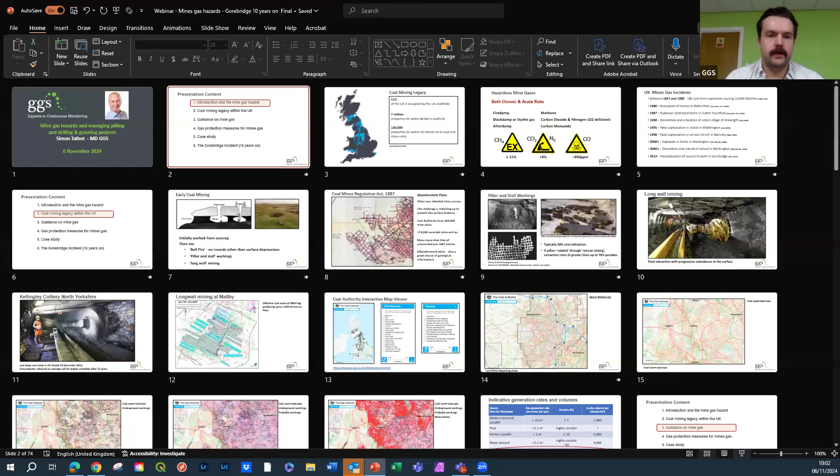So, the content I've just gone through, and we're going to finish off with the Gorebridge incident. So, diving into the first topic, an introduction to mines gas. I'm sure many of you will be very familiar with this. I'm going to turn my camera off so that I'm not distracting from the content, but I'll come back at the end. So the first topic is the extent of the mining legacy within the UK.

From Coal Authority data, 11% of the footprint of the UK is actually underlain by coalfields. That means that about 7 million properties lie within the British coalfield area, and 130,000 properties lie within 20 metres of at least one mine entry. So a significant impact on existing development, let alone new development.

The hazards we're looking at are both chronic and acute. In old terms, fire damp was one of the main risks. This is methane, but we also have black damp or stythe gas, which is carbon dioxide and nitrogen, another way of looking at it is an oxygen deficient atmosphere, which is equally dangerous. And then we have afterdamp, which is carbon monoxide.

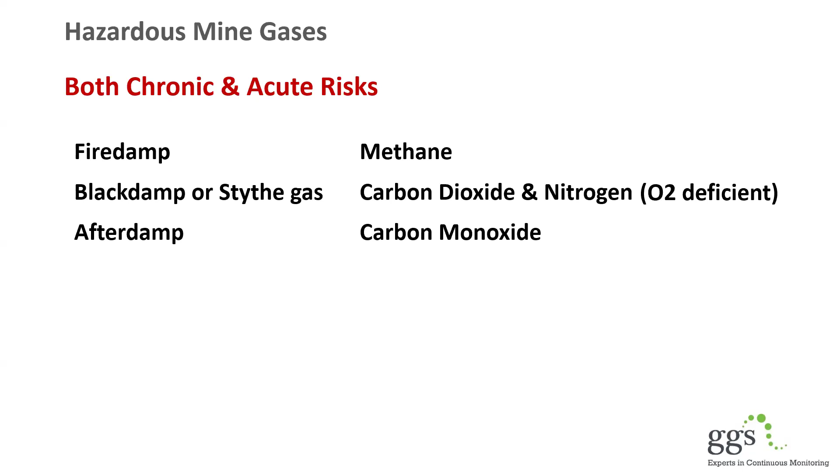So the risks are the explosive risk from methane. As many of you will know, methane is explosive between 5 and 15%. Carbon dioxide is an asphyxiant, and it is fatal at concentrations above 8%. Carbon monoxide is a toxic gas, which is potentially fatal at concentrations just over 800 parts per million.

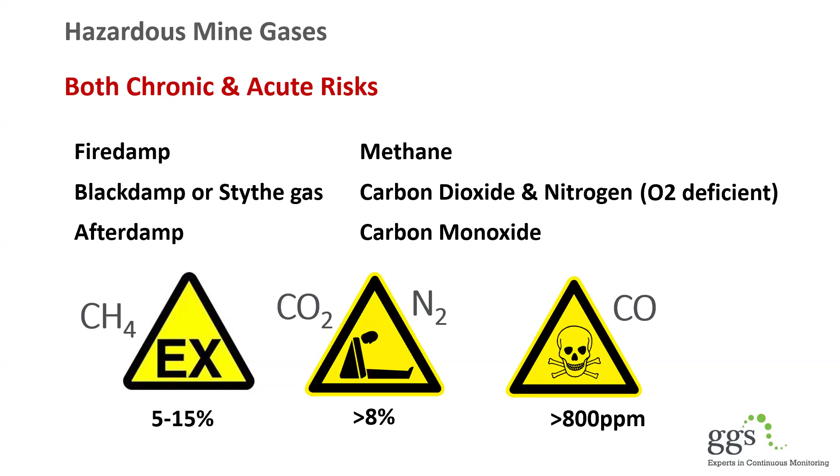Over the years, a number of people have been killed from mines gas. Within the mining industry, between 1851 and 1980, there were 186 recorded coal mine explosions, causing 10,000 fatalities.

But more recently, we've had evacuation of homes, explosions in homes, demolition and relocation of an entire village in Arkwright in Derbyshire. We've had a fatal asphyxiation in a stable in Widdrington, another fatal asphyxiation of construction workers in a service trench in Barnsley. And in the 2000s, we've had explosions in a home in Workington. And again in Workington, a school was demolished and rebuilt.

But more recently, we've had the hospitalisation of council tenants on the Gorebridge estate, and more of that at the end of the presentation. So those are the hazards and real effects associated with mines gas incidents. So let's look at the mining legacy in a little bit more detail.

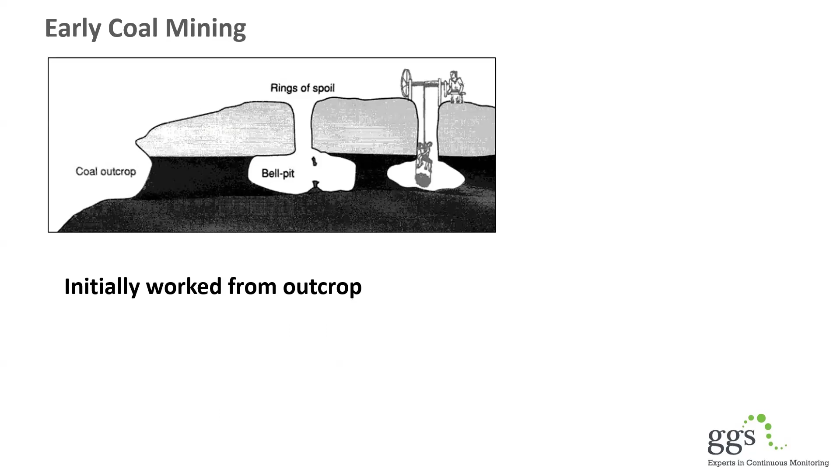Going back to Roman or even pre-Roman times, coal was won by working the outcrop. But as time went by, other techniques of winning coal were developed, and the next step was sinking shafts down to shallow mine workings and working the coal out from what are called bell pits. In places like Derbyshire, you can see the surface subsidence features associated with bell pit working.

But as time went by, even more systematic ways of working coal were developed. One of the terms, pillar and stall or room and pillar, was very widespread. It was only when we get into the 20th century that more mechanized techniques such as longwall mining became dominant.

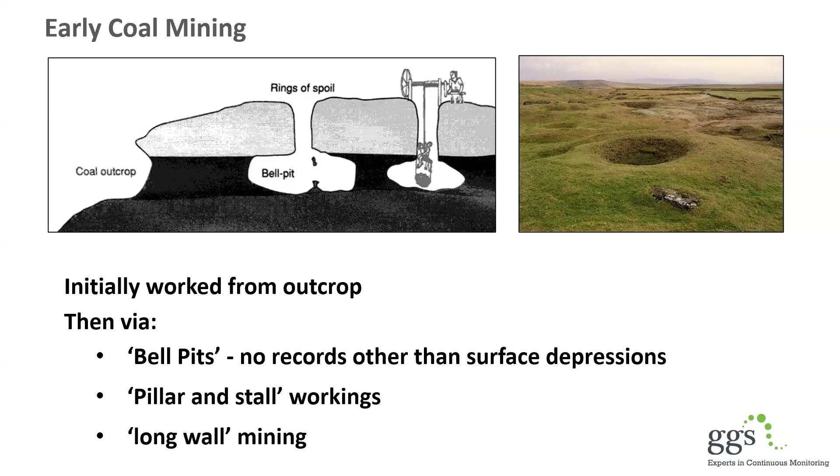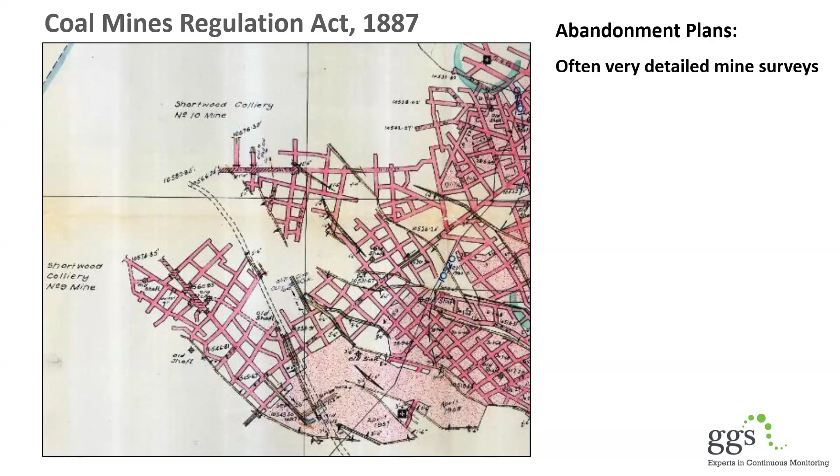So one of the key turning points for the British coal mining industry was the Coal Mines Regulation Act of 1887. And this required operators to have their workings accurately surveyed and to lodge those plans with the authorities. So these abandonment plans are often very detailed surveys of the workings, but the difficulty we have is in matching these underground surveys with present day surface features. But one thing which is common to both will be shaft locations, but these can be up to 10 meters out from current or accurate locations.

So the Coal Authority is a legal body responsible for holding these abandonment plans, and they have approximately 360,000 of them. And on these plans, there are 172,000 recorded mine entries. But unfortunately, there's many, many more unrecorded entries which predate the 1887 legislation. Another feature is that these abandonment plans have been a great source of geological information because they record the location of faults and the dip and strike of the different strata.

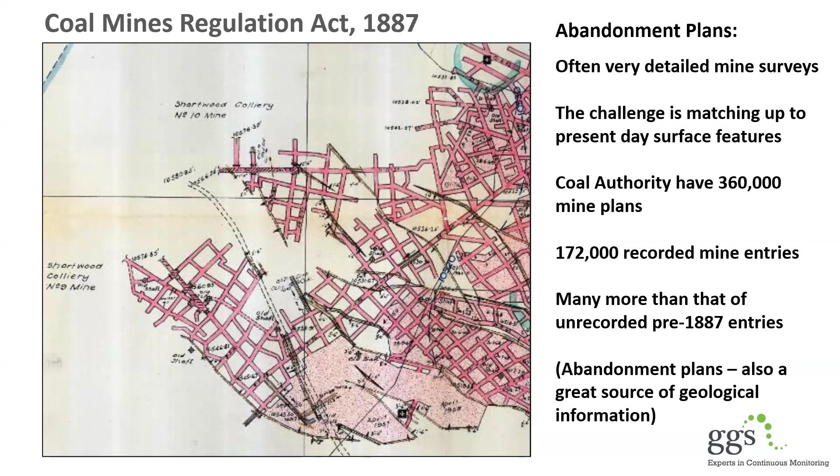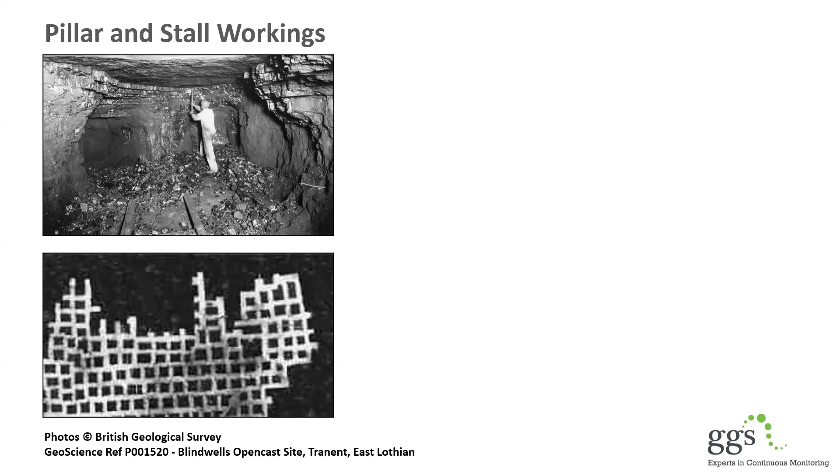So pillar and stall workings are often represented on these plans, and this is a photograph of how they were actually worked by hand. And in plan, this is the sort of workings that would be developed: systematic roadways and cross-linking rooms or stalls linking those roadways. We can also see where they've been exposed in open cast mines, and very clear representation there in this photograph from the Blindwells open cast site.

So typically, pillar and stall workings will have a minimum of 30% coal extraction, but often, as a district was worked out, the operators would require pillars to be robbed in what's called retreat mining back towards the shaft. Clearly, taking coal out of the pillars reduces the safety of the roof, but as they moved back towards the shafts over time, extraction rates could reach up to 70% in some cases.

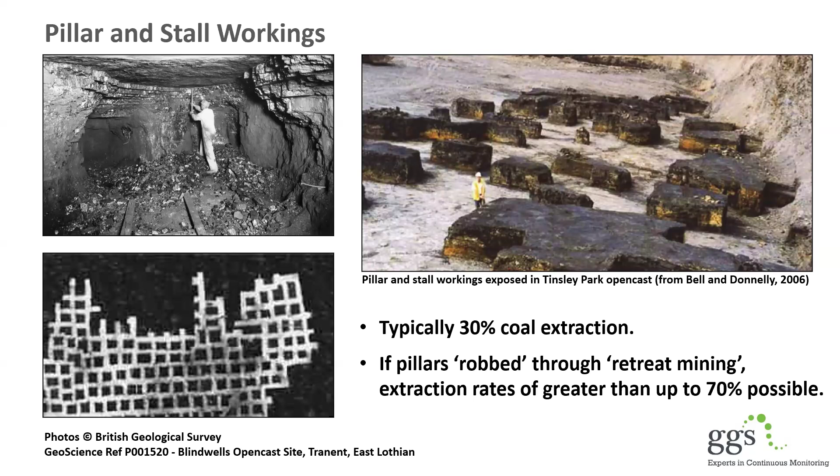And this allowed progressive subsidence behind the active working face. And this led to a subsidence wave hitting the surface. And this was predicted. And in my early career, when longwall mining was still active in the early 1980s, one of my roles was to actually calculate what sort of surface subsidence was going to occur.

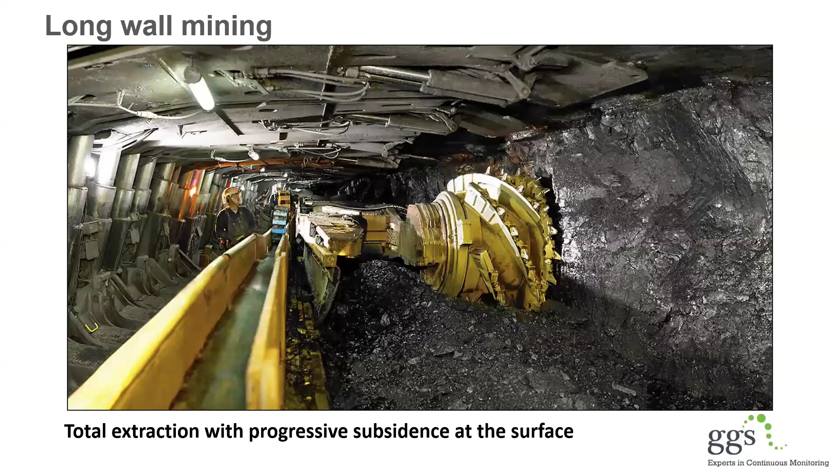But this is a more accurate photo of what was involved. It was extremely noisy, created a huge amount of dust, and was a very unpleasant working environment. This was a photo of the last deep coal mine, which was the Kellingley Colliery in North Yorkshire, which closed in 2015.

One point to make with regard to these mine workings: to be safe, they required dewatering of the seam down to the depth of the worked seam. So when the operations finished, the pumps were turned off, and one of the effects was groundwater rebound. And typically this would take many years before it actually reached the natural water table. In some cases, perhaps 15 years.

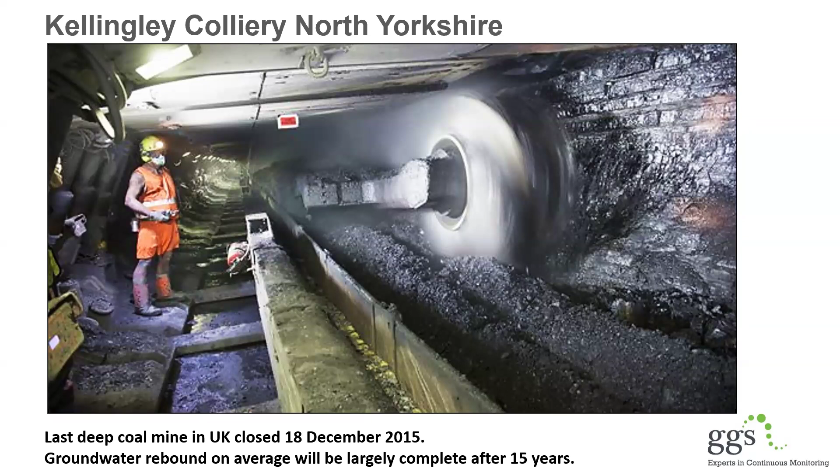So all of these available plans are visible on the Coal Authority Interactive Map Viewer. And it shows a scalable map of the UK. And you can click on different features.

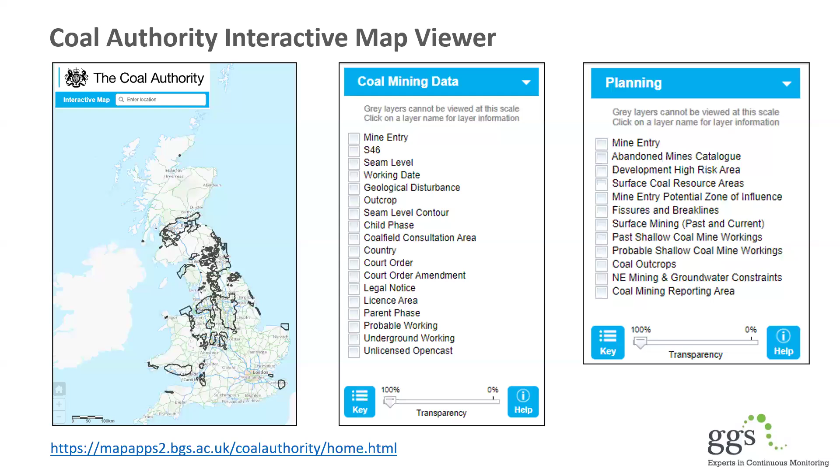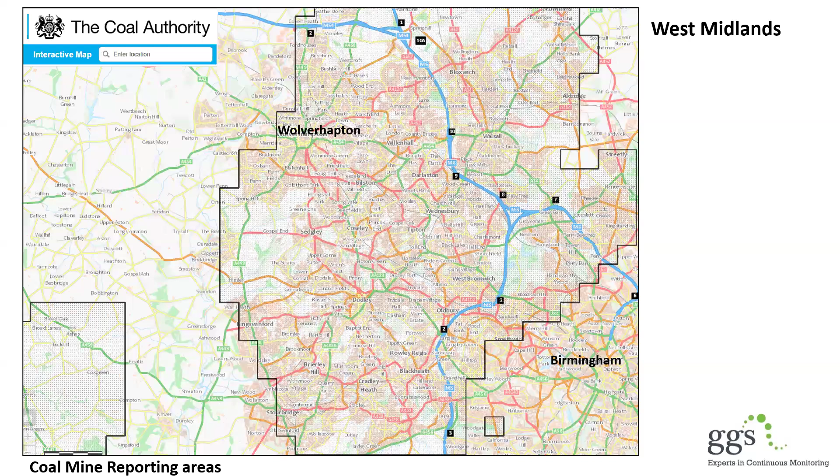Now, in the 1980s, I was a young engineering geologist working in the West Midlands, more specifically the Black Country. And this is an area that I was working in with Wolverhampton in the northwest and Birmingham to the southeast, and the towns in between, Dudley, Sedgley, Coseley, Bilston, Wednesbury.

And this is from the Coal Authority interactive map, and I have shown you the mapping of the coal seam outcrops. Overlaying on top of that, I can show you the underground workings that are recorded and the probable workings that the Coal Authority believe are likely to have been worked. And then the last layer is the recorded mine shafts, and literally there's thousands of them across this small area.

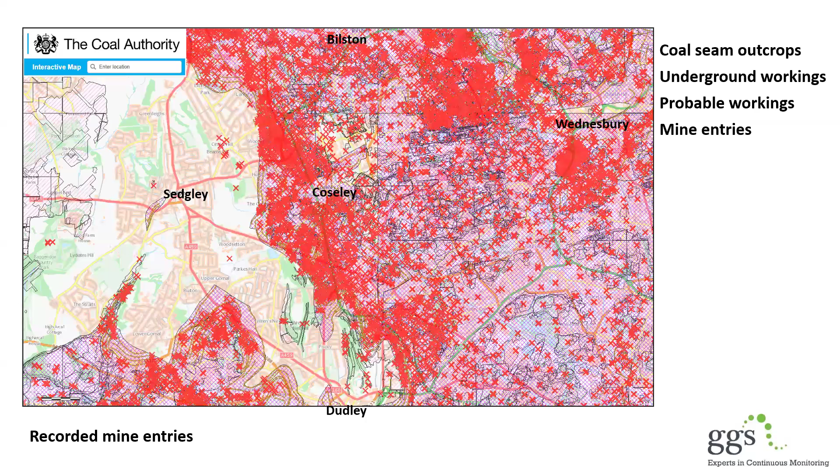Some of those recordings will be multiple records of the same shaft in just slightly different positions on different maps, but literally there are thousands of recorded mine shafts here. So

taking a step back and looking at pillar and stall workings in particular against the other ground gas hazards that we are having to deal with. Mines gases sit lower down on this table, but we're also concerned with, as an industry, landfill gas from modern licensed landfills. They have the protection from containment systems and gas extraction systems.

We have naturally occurring deposits which can generate ground gases such as organic peats, but the over 20,000 former landfills which were unlined that date back from the 1960s, 70s and 80s, they are a significant hazard. But of all of them, pillar and stall workings have the potential, because of their open nature and extraction rates, of having the largest volume of hazardous gases of all of these different sources.

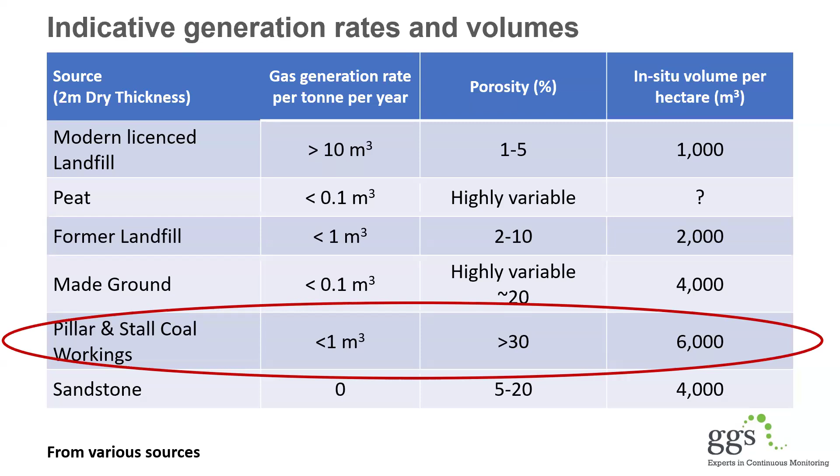So let's look at some of the guidance on mines gas, and I'll just make reference to these three documents. CIRIA C758, which was published in 2019, the Abandoned Mine Workings Manual. This is a comprehensive document running to 545 pages, so it takes quite a bit of time to get through. We have the Coal Authority guidance on managing the risk of hazardous gases when drilling and piling near coal. This was also published in 2019.

And then more recently, we've had the CL:AIRE guidance for good practice for risk assessment for coal mine gas emissions, published in October 2021. So going back to the CIRIA document, this covers both coal and non-coal workings and summarises former mining activity by county. So there's a separate chapter in this document talking about the specific mining operations within that particular area.

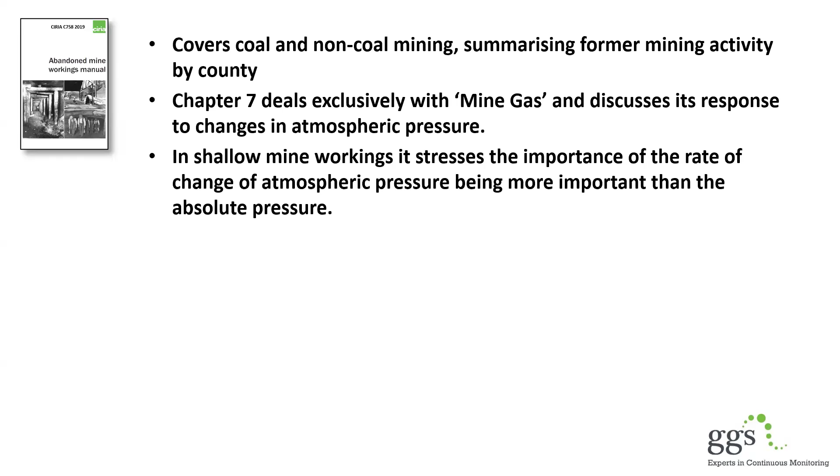But chapter 7 deals exclusively with mine gas and discusses its response to changes in atmospheric pressure. It also stresses the importance of the rate of change of atmospheric pressure in shallow mine workings, and that the rate of change is more important than the absolute pressure. It also gives guidance on how to investigate and stabilise abandoned mine workings through techniques such as drilling and grouting, and the importance of gas monitoring during these operations. A little bit more of that in a moment.

The Coal Authority guidance includes a slightly different remit. It's a more readable document. It's a lot shorter, but it stresses the CDM regulations and the roles and responsibilities of the different actors working in this sector. It goes into the coal mine gases, properties and problems, and talks about gas monitoring. It talks about the hazards associated with the influence of drilling flush and injected materials, and then some practical measures and legislation, including the different permissions and permits that are required.

It talks about the risk assessment and the source pathway receptor model, and things like the emissions at rigs and from boreholes, spontaneous combustion, and off-site risks. And it gives a summary of other guidance documents, and then finishes off with a number of case studies. There's two elements that I want to particularly bring your attention to, and that is their identified risk from blowout from pressurized workings.

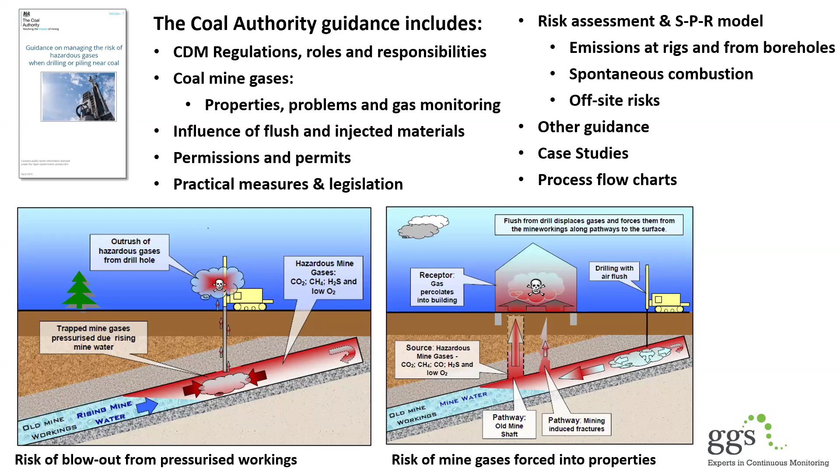The CL:AIRE document provides a good practice guide and describes the mining techniques in a summary form, but stresses the importance of the mine's gas hazards and the investigation and risk assessment process, and provides good case studies at the end. It's interesting to note that the authors identified a number of significant problems that have been present in our sector. The lack of critical thinking, the lack of understanding of specific factors, the lack of schematic conceptual site models through sites, and the over-reliance on spot ground gas monitoring.

Also, they make reference to little or no consideration of the uncertainties. And finally, they talk about the key pathways such as boreholes not being located or sealed. Well, that is something which I'm going to be stressing in some detail over the next short while. So the CL:AIRE document also has some excellent graphics, which talk about the source pathways and migration drivers in the document.

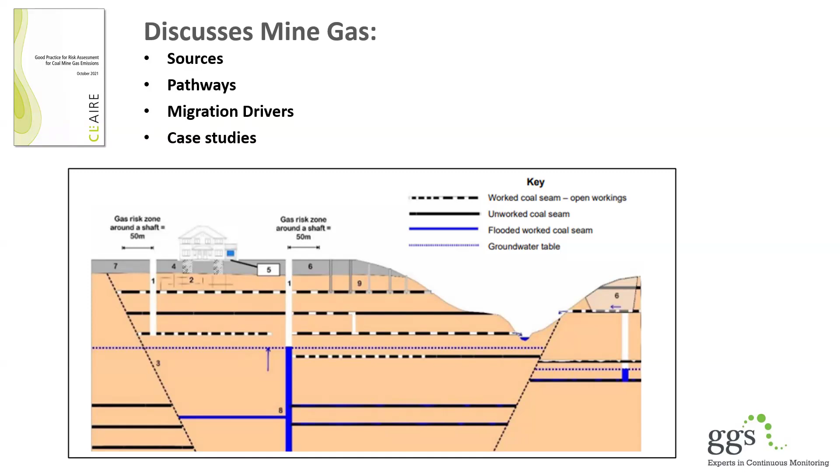So let's move on to just a very brief touch on how do we protect properties, new development, from mines gas. And really it's the same as we have had for other gases. But you may ask the question, if there have been so many homes located in former mining areas, why haven't there been more problems? Well, one comment to make is that a lot of those properties are older homes, perhaps built Victorian terraces or 1930s vintage homes.

And these were often built on shallow strip footings with elevated suspended ground floors and a fully ventilated subfloor void. They were also poorly insulated and drafty. So if there were any mines gases entering the property, then they were probably very easily dissipated. Those points are not necessarily true for modern properties.

But the truth is that actually over the last 30 years, there's been 60 recorded mine gas incidents within the UK. So you could argue that actually these are not such uncommon problems. And modern houses, they may be better insulated and they may not be drafty, but as a consequence, if mines gases are getting into them, then those mines gases are being trapped and are potentially more hazardous as a consequence.

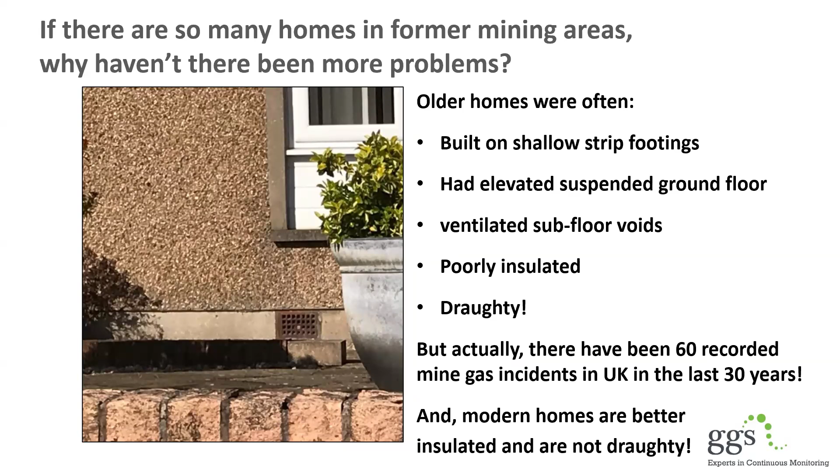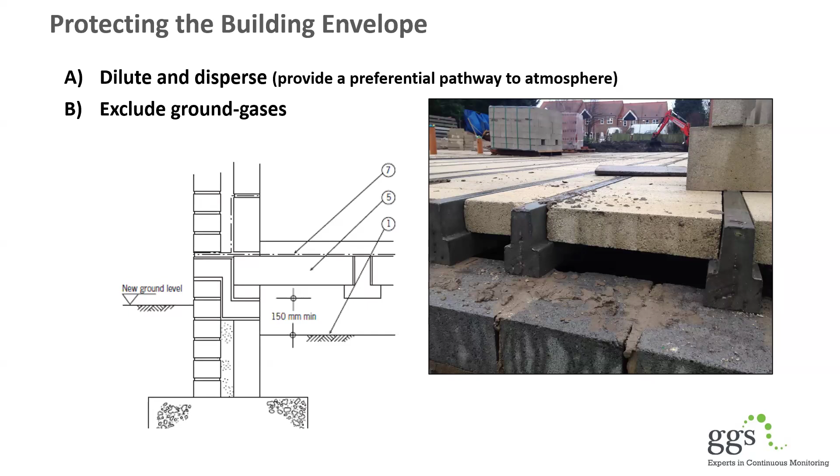So how do we protect these modern houses? Well, it's a twofold approach, trying to introduce a dilute and disperse preferential pathway to atmosphere. South of the border, typically new homes are built with suspended beam and block floor. North of the border, there may be a raft foundation built on a permeable gas distribution layer, granular layer, for instance. So, relatively straightforward and easy in theory, but it's the application of these and the detailing that is important to get right.

So let me just talk about a case study in South Lancashire that a local authority asked our advice on. And this was a very straightforward, small development in a former mining area, which was known to have shallow abandoned mine workings. And this is a conceptual site model that I've prepared for it. The site had over 5 meters of boulder clay, and there were known workings at between 13 and 15 meters depth beneath the site.

So a clear source pathway receptor model identified mines gas as a hazard. Also, mines gas in the backfill in a nearby open cast area. Excuse me. And then we have perhaps mines gas present in the permeable sandstone layer. Pathways potentially through drift deposits in the boulder clay, such as sand or gravel layers, and then receptors for proposed houses.

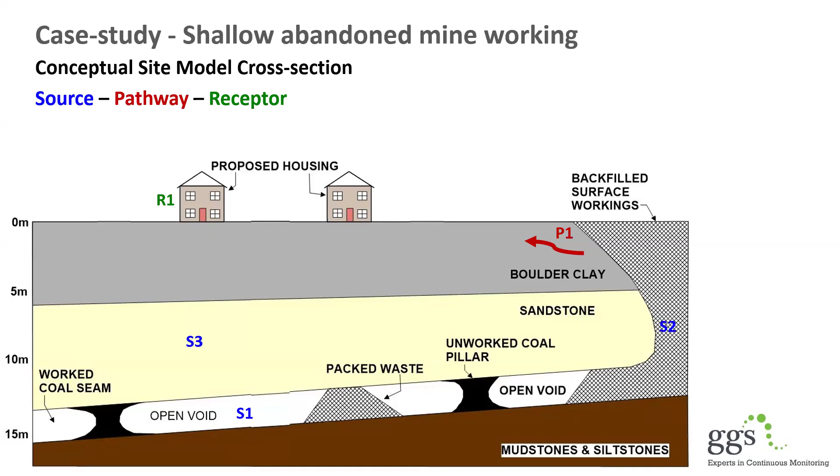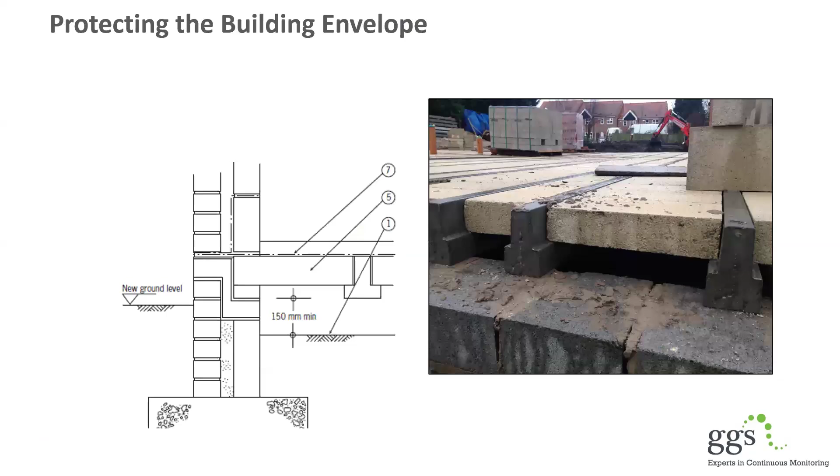So very clear potential source pathway receptor model, and the developer employed a contractor to investigate it because there was a credible pollutant linkage, all very good. So a number of shallow monitoring wells or boreholes were drilled into the clay to investigate the presence of permeable strata. Whoops. Sorry. And the monitoring in those monitoring wells found no gas. The boreholes identified no sand or gravel layers. So the recommendation was that no gas protection was necessary.

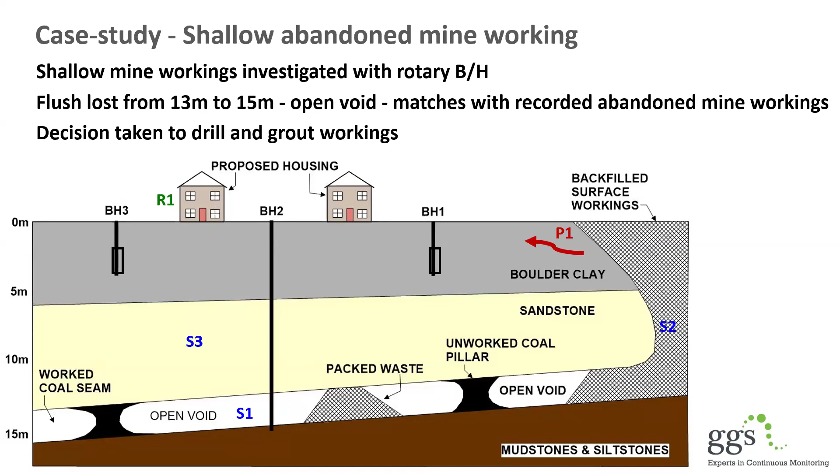But the structural engineers came in and said, well, there's shallow mine workings and we need to investigate those. So they sank a rotary borehole and they discovered open voids and lost flush between 13 and 15 meters. And that matched the recorded abandoned mines workings. So they made the decision to drill and grout. And that resulted in that initial open hole borehole representing an introduced preferential pathway. But if it was outside the footprint of the houses, that shouldn't have been a problem.

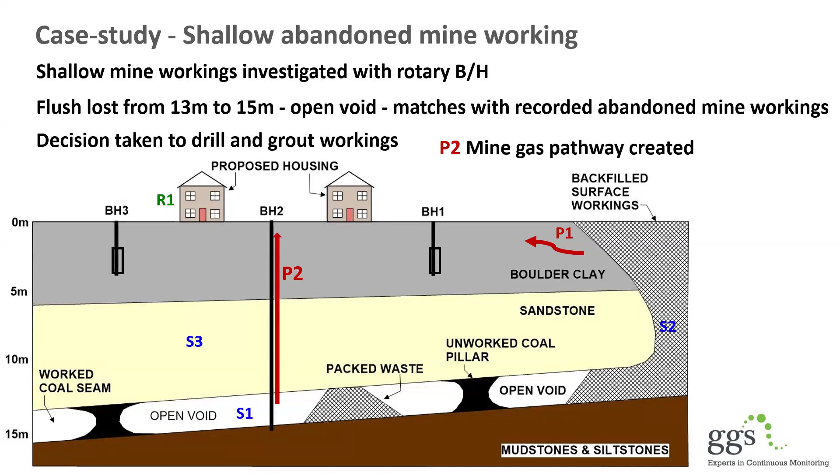But the grout holes were under the footprint of a building, and each one of them represents a potential pathway. For a standard NHBC house footprint, 8 meters by 8 meters, that's likely going to result in 9 grout holes, 9 preferential pathways beneath each of the homes. And is this realistic? Is this a realistic hazard that has just been created where one wasn't there previously?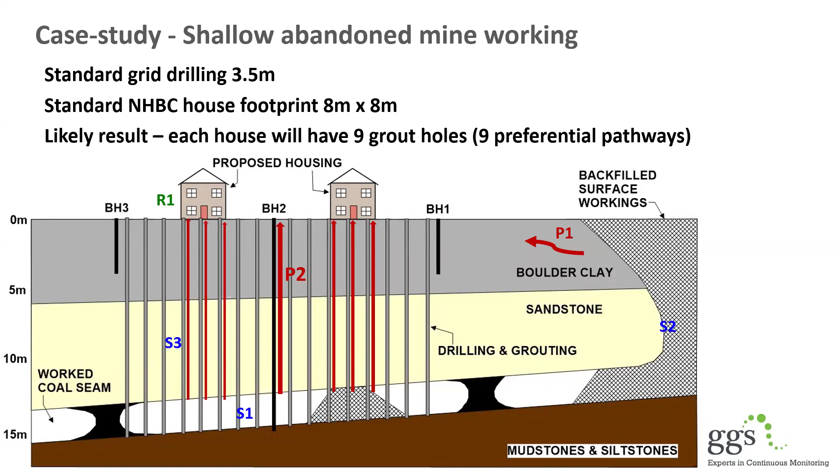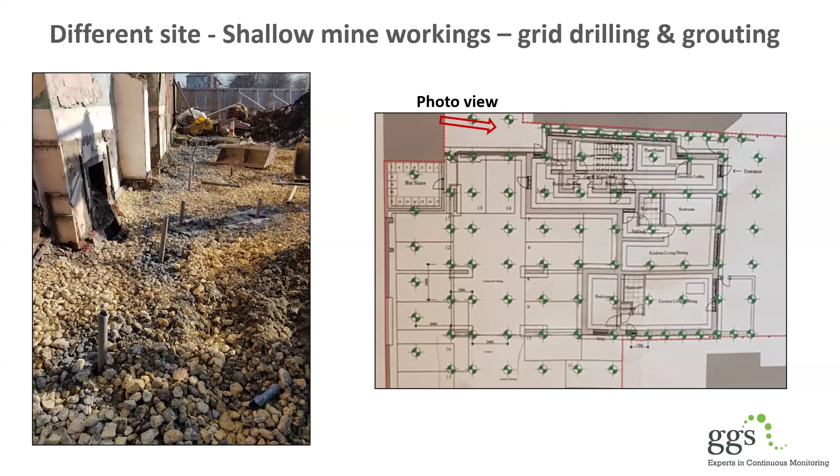But the grout holes were not topped up, and they were open to depth, possibly open to depth to the mine workings. So this is what should happen in a grouting operation. Open holes are drilled into a worked coal seam. Tremie pipes are installed, and grout is pumped through those pipes into the mine workings.

And when the workings are full, grout will back up those boreholes, and the grouting crew will move on to the next borehole. But over minutes or hours, the grout can slump. And if the grout hole has intersected a roadway, the grout could actually run away down that roadway off-site, down gradient off-site. So often you'll find that the grout has dropped away and the hole has remained open.

So those open holes should have been topped up. The next day, the grouting crew should have gone round and filled up all of these holes. But in this case, they hadn't. Also, it's important to note that payment is made on measured quantities. So would a client rely on the contractor to tell him or her what quantities were used?

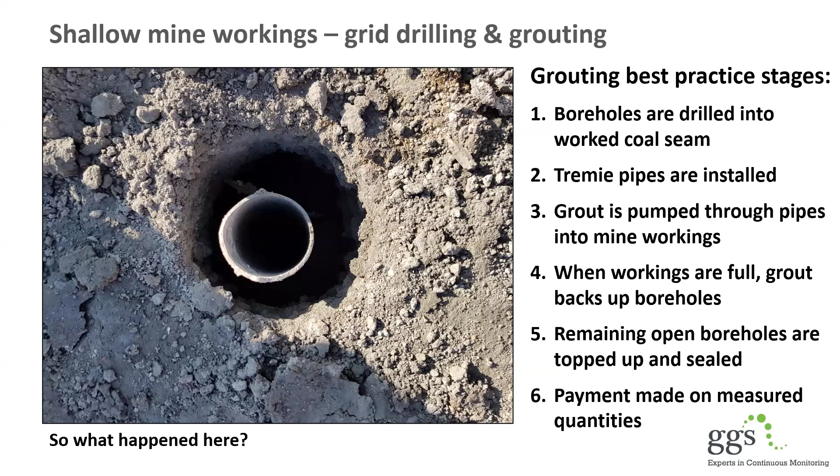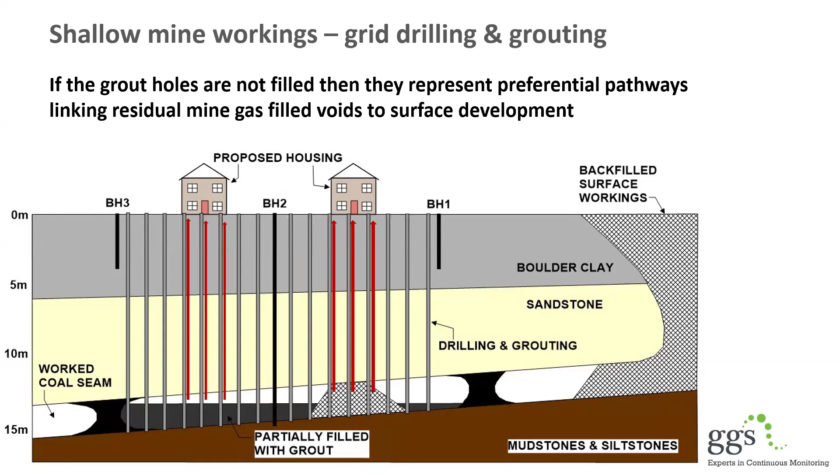So what happened here? Well, you could argue that it was not properly supervised. Construction quality assurance was not maintained. So going back to this situation, if these grout holes remain open, then they do represent a real risk. And if the mine workings haven't been fully sealed, then there could be a residual volume of mines gas as a reservoir that could be at risk of flowing into the houses.

So we also have other geotechnical issues associated with these former mining areas. I made reference to long-term settlement from longwall mining. You also have long-term settlement from open cast backfill, potential risk of crown hole collapse over the intersections in pillar and stall workings. You have shaft collapse of recorded shafts, or even a shaft collapse of unrecorded shafts, which no one knew were present.

But we also have engineering solutions: reprofiling of sites and recompacting, dynamic compaction, or vibropiles. I mentioned drilling and grouting, but we also use piled foundations and raft foundations in these areas. The point I'd like to make is it's really important that some form of CQA is introduced. And if the site is changed, then is there someone made responsible for reassessing a mines gas risk?

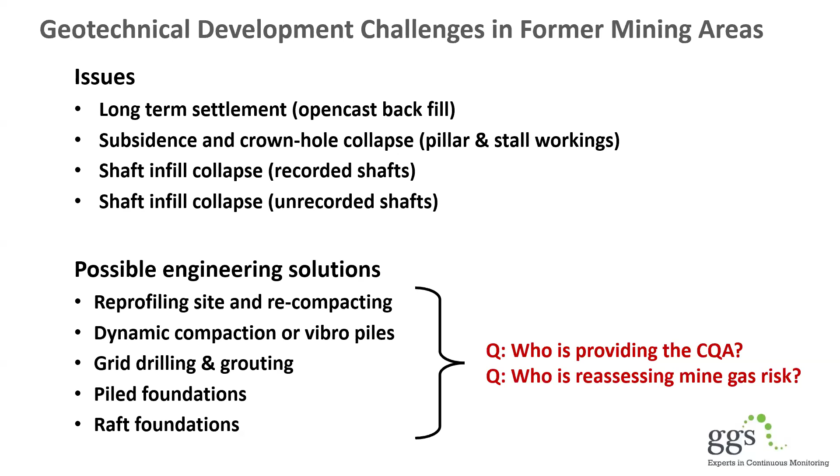So this leads us on to the Gorebridge incident. It's now 10 years since the estate was evacuated and the NHS Trust were carrying out their investigations into what happened on site. But just as a brief recap, this was a social housing estate built by Midlothian Council in 2009. In 2014, a number of council tenants were overcome by gas and taken to accident and emergency, and the affected homes were evacuated.

What actually happened? Some teenagers were having a sleepover in one of the houses. They were in sleeping bags in the living room. When the parents came down on a Saturday morning, they couldn't wake the teenagers up, and they were rushed to hospital. Luckily, they survived. But over the subsequent few months, a total of 22 people had either attended accident and emergency or sought medical advice from their GP.

Long and short of it, after the investigations, it was found that it was mines gas that was the problem. And Midlothian Council took the very hard decision that the best way of resolving the problem and reassuring future tenants of the site was that the whole housing estate be demolished and rebuilt, 64 homes in total.

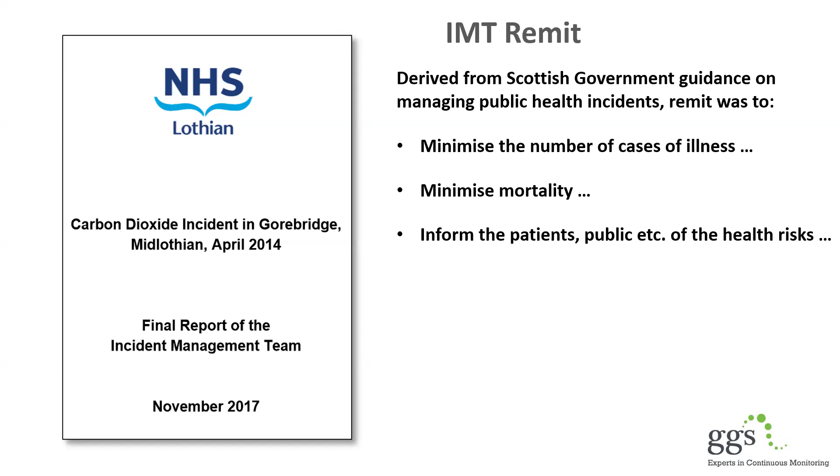So I'm going to make reference to information which is in the public domain, primarily from the NHS Trust's Incident Management Team final report published in November 2017. I should make the point that the IMT remit was derived from the Scottish Government's guidance on managing public health incidents, and the remit was to minimise the number of cases of illness, minimise mortality, inform patients and the public of health risks, and collect information for use in better understanding of a problem. It was not to consider who, if anyone, was culpable.

So just to give you a sense of the site, this was Gorebridge, an area of former housing which had been cleared for redevelopment in the middle of the town, and this was the new estate that was built, and this is an aerial photograph from 2012.

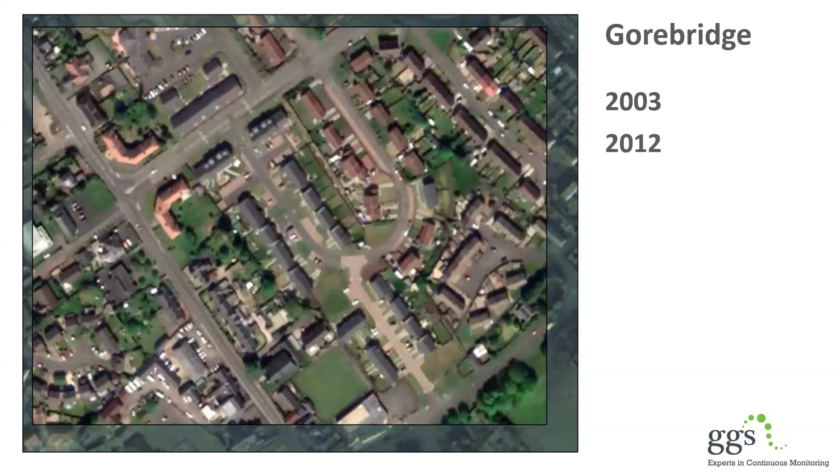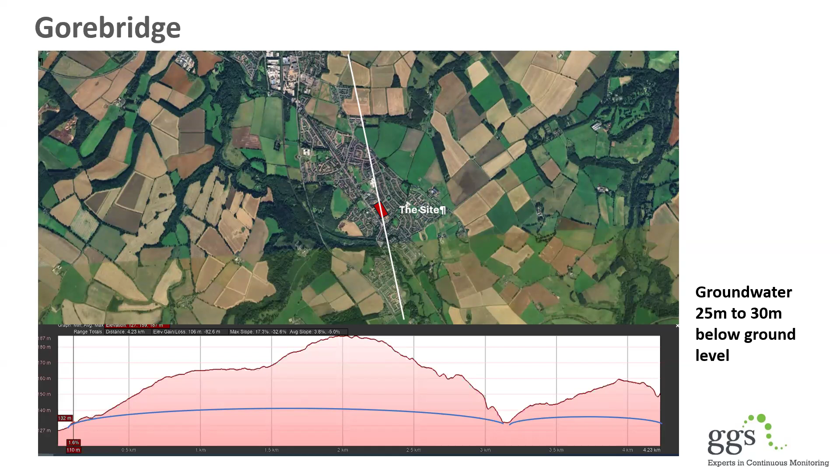In terms of position and topography, this is a Google Earth satellite photo of the site with a cross-section through, and you can see that the site was near the crest of the hill, and the groundwater level, as controlled by nearby streams, was probably 25 to 30 meters below ground level. So from that, any shallow mine workings would have been open voids.

So from the IMT report, we have a chronology that includes an initial consultant A doing a phase 1 desk study, and they identified mines gas as a potential hazard. Consultant B was appointed, and they instructed contractor C to carry out a phase 2 site investigation. Later that year, in 2006, the supplementary phase 2 site investigation was carried out.

In 2007, consultant D was appointed, and contractor E was appointed to carry out drilling and grouting. And finally, consultant F was appointed to oversee the main contractor G to construct the homes. And then a few years later, the first health issues came to light. Altogether, including Midlothian Council, 8 different organisations were involved in the design and construction of this scheme.

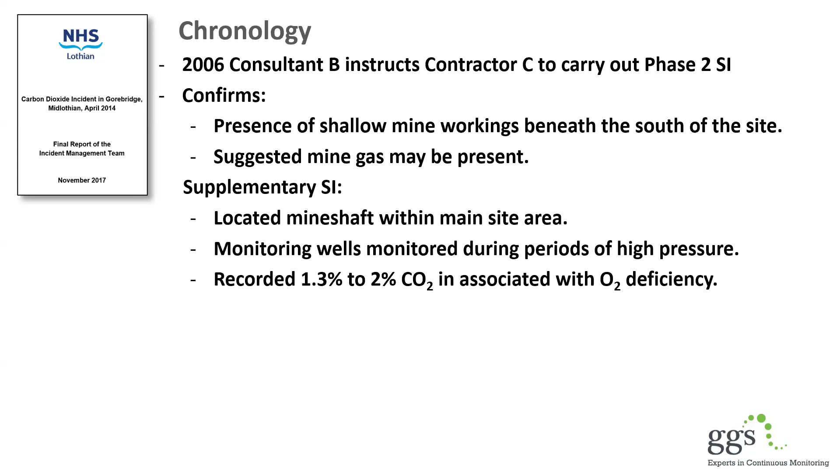So just focusing in on this element, the consultant B instructing contractor C to carry out the phase 2 investigation confirmed the presence of shallow mine workings beneath the site and the possible presence of mines gas. The supplementary site investigation located a mine shaft within the main site area, installed monitoring wells, and during periods of high atmospheric pressure, recorded low concentrations of carbon dioxide and an oxygen deficiency.

Their recommendation was that the site represented a CS1 and no gas protection measures were required. At that point, mines gas was removed from the revised risk register, and therefore no gas protections were included in the design. My point would be that someone should have spotted that there was a mismatch between what was found in those shallow monitoring wells and the actual risk from the known shallow mine workings.

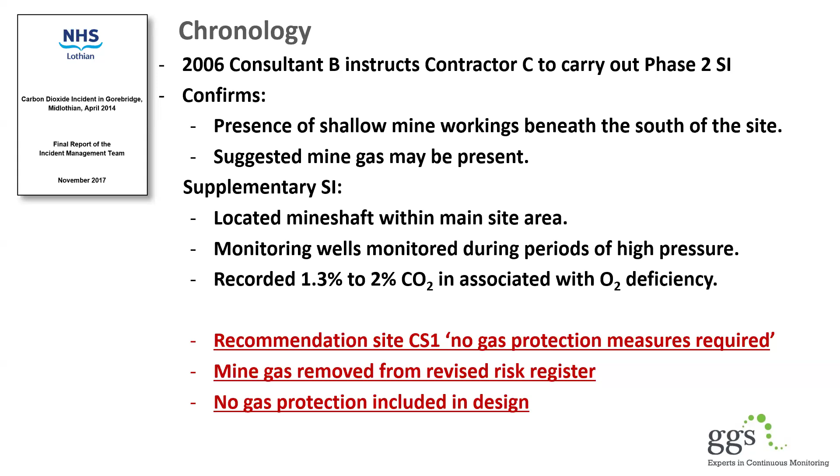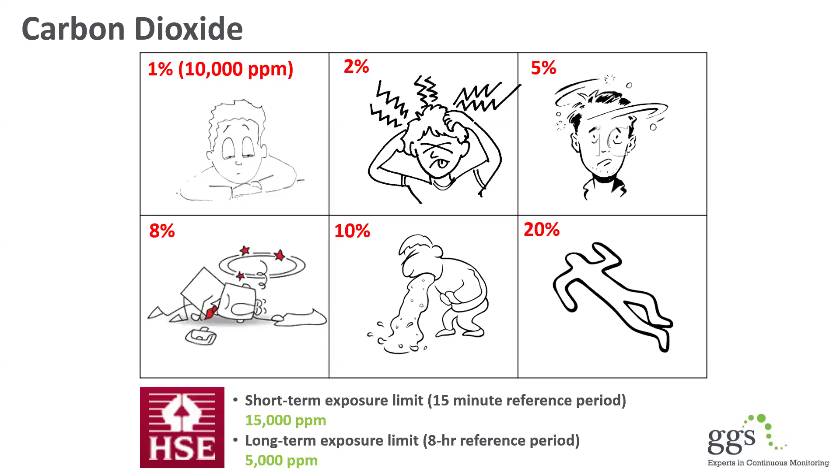As part of the IMT investigations, they recruited the Coal Authority, officers from Midlothian Council, and they appointed consultants to investigate the site. The Coal Authority investigations included monitoring the affected properties, and they found that the downstairs toilet had 8% carbon dioxide. The lounge, where the teenagers had been sleeping, had 12% carbon dioxide. Beneath the kitchen floor, they found 19% carbon dioxide, 21% within the ground immediately beneath the raft, and 23% within the property's cavity walls.

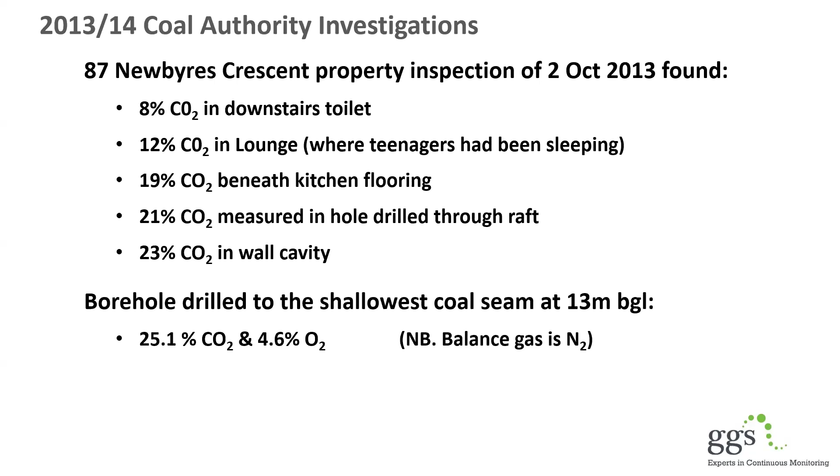They went into the back garden and drilled a well to the shallowest coal seam, which was found at 13 meters depth. They found 25% carbon dioxide in that seam with an oxygen deficiency of 4.6% oxygen. The balance gas, of course, is nitrogen, and nitrogen in itself is an asphyxiant. Importantly, they found no grout in that coal seam. They also took samples for radiocarbon dating, and that identified the gas within the house as of geological origin. In other words, it had the same fingerprint as the mines gas found in the coal seam.

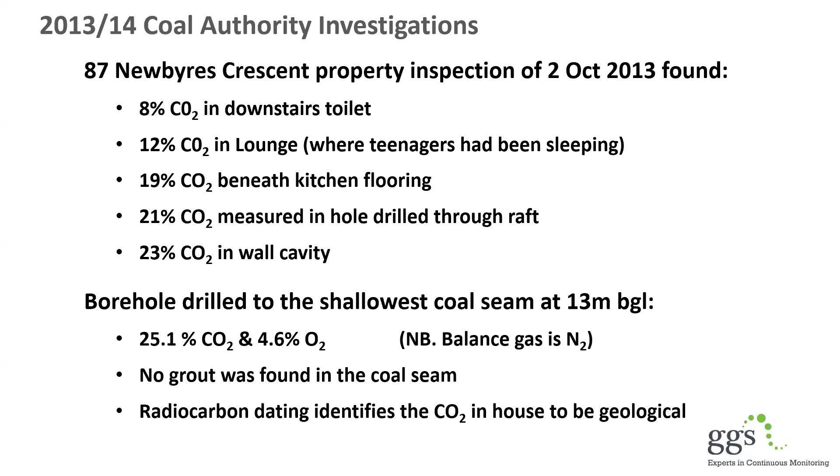They carried out continuous gas monitoring within the understairs cupboard in number 87. This graph is a little bit complicated, but the blue line is the rising, falling atmospheric pressure. The red line is the carbon dioxide concentrations at this location. And every time the atmospheric pressure dropped, carbon dioxide concentrations were spiking up to almost 25%.

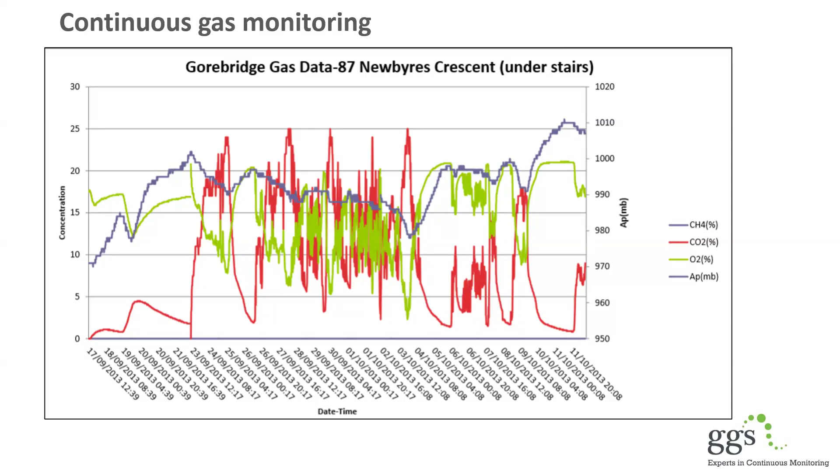After this, the Coal Authority installed alarms in 56 of the properties on the estate. And this is the record of the alarms going off. You've got the atmospheric pressure recorded on the top graph and the record of the alarms being sounded on the bottom graph. The line on the bottom graph represents a number of occupants in those houses. Over a period from April 2014 to October 2014, gradually householders were being decanted and evacuated before the whole estate was finally evacuated. And you can see that periods of atmospheric pressure falls correspond with increased levels of the alarms going off.

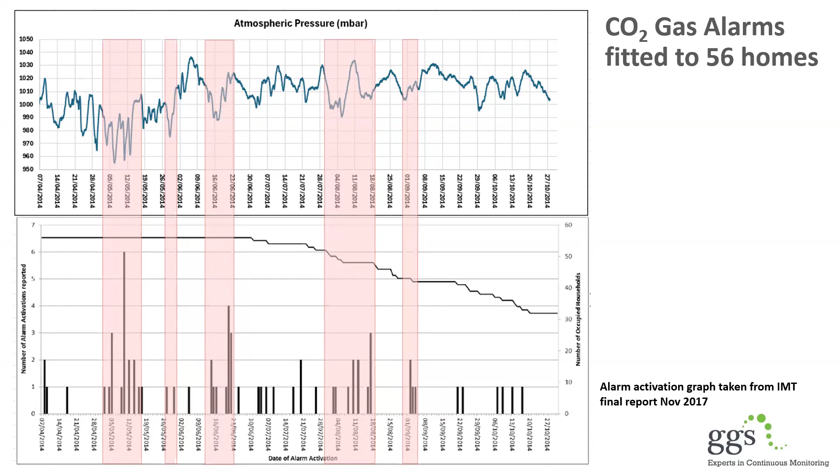Also, the NHS tracked evidence from another source. They found that almost 84% of the households that were fitted with alarms had pets, dogs and cats primarily. And 11% of the residents reported that their pets were ill during periods when the alarms were activated.

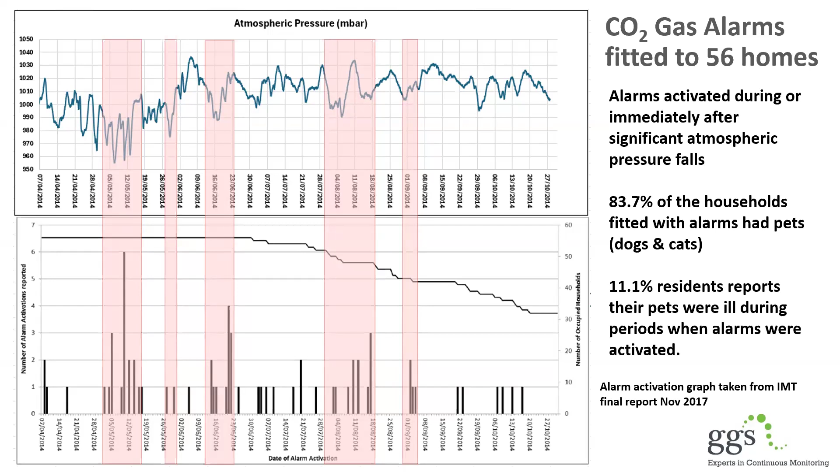So let's move to the drilling and grouting operations. And again, this is information which is present within the IMT report and the location of 87 Newbyres Crescent. So repositioning this into this format, we can see the plan of the buildings, the number of vibrostone columns beneath the raft foundations, the location of the cable percussive boreholes and the rotary boreholes for coal seams.

The blue is a surface water attenuation tank some distance away from number 87. And the stars represent the grout holes. And the grout takes varied from less than 1 ton right through to greater than 10 tons of grout recorded in those orange grout holes. And then each house was pressure tested with a single borehole.

Now, I spent 4 years of my early career as an engineering geologist in the West Midlands, supervising drilling and grouting operations to a large extent. That formed a major part of my work. And what we see here is generally recognised as good practice in Scotland, but south of the border, it's typical that where you've got high grout takes, certainly greater than 10 tons, that the drilling grid is closed up and supplementary grout holes are installed to ensure that all of the voids are fully sealed.

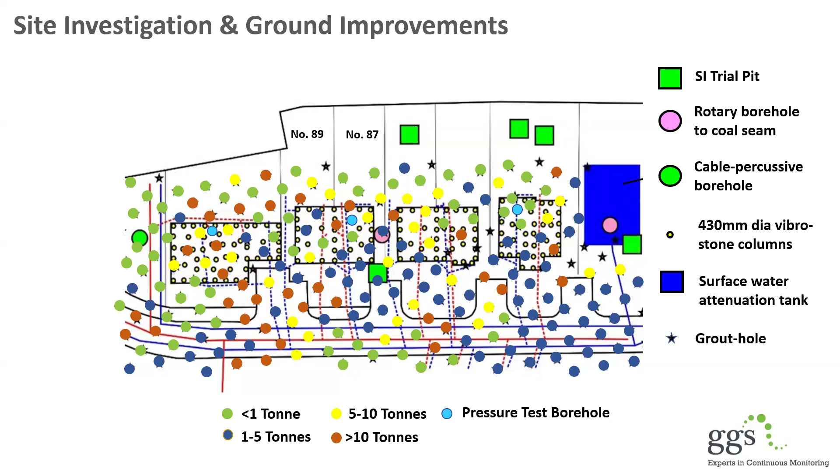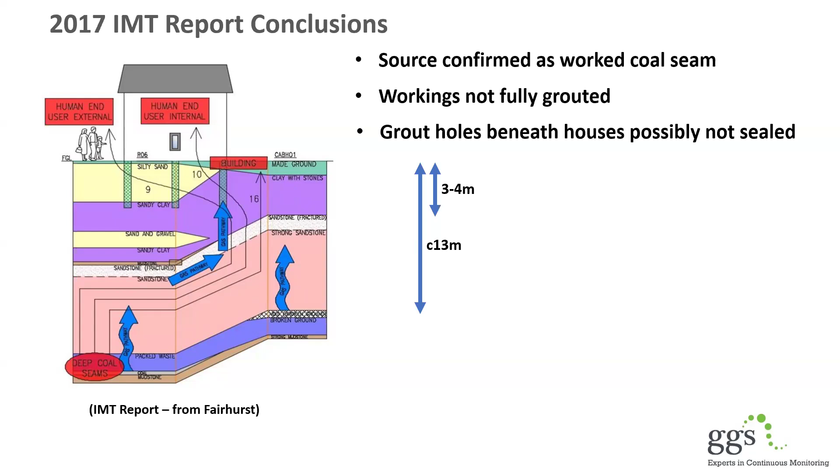Anyway, the IMT report conclusions confirmed that the worked coal seam was the source of the carbon dioxide. They suspect that the workings were not fully grouted because the borehole they drilled into the back garden didn't find any grout. They suspect that the grout holes beneath the houses were possibly not sealed and that the site investigation boreholes beneath the houses may not have been sealed.

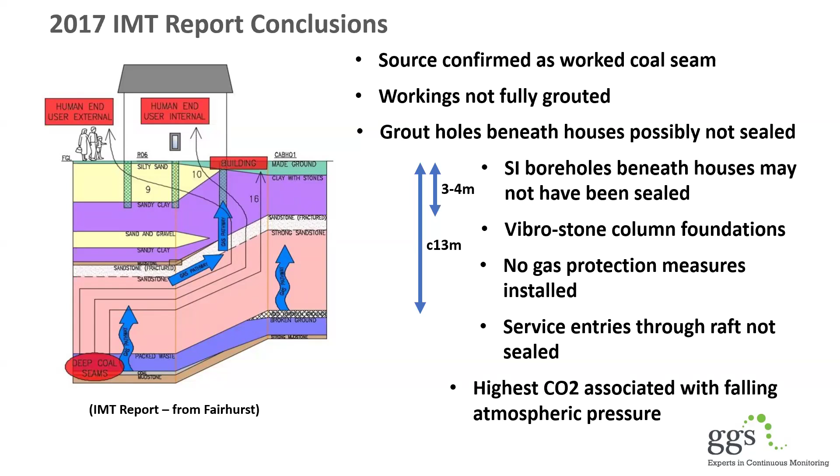They also note that vibrostone columns were used under the rafts and no gas protection measures were installed. And service entries through the raft were not sealed either. Finally, they conclude that the highest carbon dioxide concentrations within the houses were associated with falling atmospheric pressure.

So let's just look at the atmospheric pressure which actually happened during that period in September 2013. This is the date, the Saturday morning, the 7th of September, when the teenagers were hospitalised. And in the preceding 48 hours, the atmospheric pressure had dropped by 18 millibars. But as you can see, a few days later, pressure falls of between 25 and 35 millibars were not unusual.

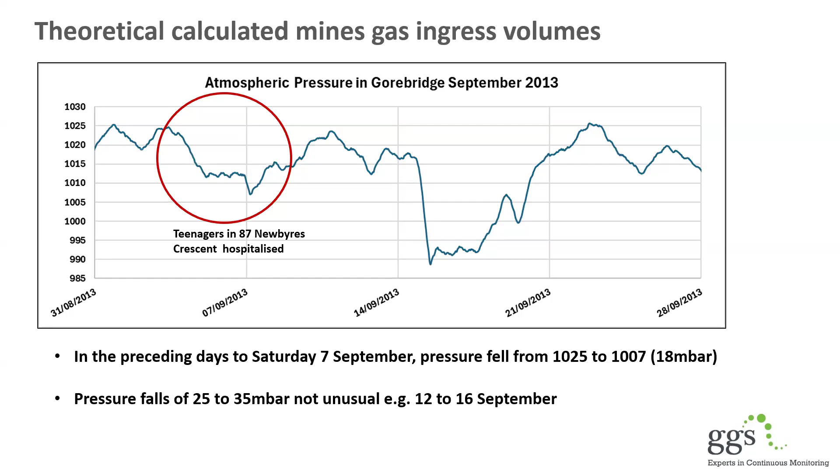So let's take a theoretical look at the effect of open mine workings which may have been grouted. And this is theoretical. Take a plan of pillar and stall workings and place a new build over it. Let's assume that the worked coal seam thickness was 2.3 meters, the depth to the pillar and stall workings was 13 meters, the extraction rate was 30%, and the width of the house 8 meters. Let's assume we have an area of influence that is 3 times that house width, i.e. 24 meters. That would give us a residual void space in the mine workings of 312 cubic meters.

If we assume that 90% of the area beneath the housing was grouted and 50% beyond the limit of the housing was grouted from runoff from the grouting, that would reduce the residual void space to 71 cubic meters. Now that's what it looks like in cross section, and there's that 90% grouting beneath the houses.

If we look at an atmospheric pressure drop of 18 millibars, and looking at Boyle's law, we work out the drop in pressure and the effect on the volume, we could see that in that circumstance, we would get 1.3 cubic meters of gas entering a house up an open grout hole. However, if we look at this circumstance with a 35 millibar pressure drop, then that would result in 2.5 cubic meters of oxygen deficient, carbon dioxide rich gases, mines gases, getting into the house.

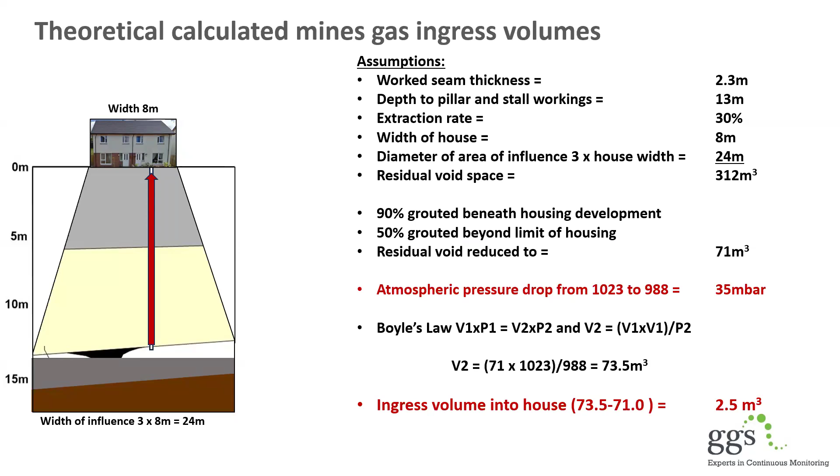Is 2.5 cubic meters a lot? Is that a hazard to be worried about? Well, let's look at it in a slightly different way. Let's assume that instead of what we've just looked at, where we have an area of influence, all of the mine workings are interconnected, and we are looking at a mined area of 40 meters by 80 meters. Well, that would have a residual void space of 2,208 cubic meters of mines gas.

If we assume that 90% was grouted beneath a housing development and 0% beyond the limit of the housing, remember the Coal Authority found no grout when they drilled a hole in the back garden, that would give a residual void of 815 cubic meters. If the atmospheric pressure drop of 35 millibars took place, then the ingress volume into that house could potentially be 29 cubic meters. And that certainly is a volume to be worried about.

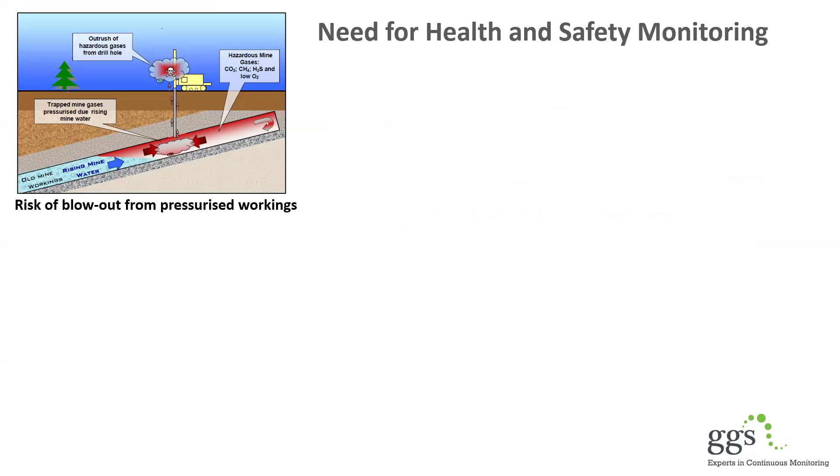So in the last few minutes of the presentation, I'll go back to the Coal Authority guidance documents and the need for health and safety monitoring. If you are facing this potential risk of blowout, then it's important that the drilling and piling operations, the drillers, wear personal gas alarms, that there are static alarms on the drilling rigs, and that there is spot monitoring of the open holes periodically across the operations.

With regard to the risk to nearby properties and the potential risk of displacing mine gases into those properties by introducing flush or grouting materials, then, in addition to those previous protections, it's important that those sensitive receptors are continuously monitored.

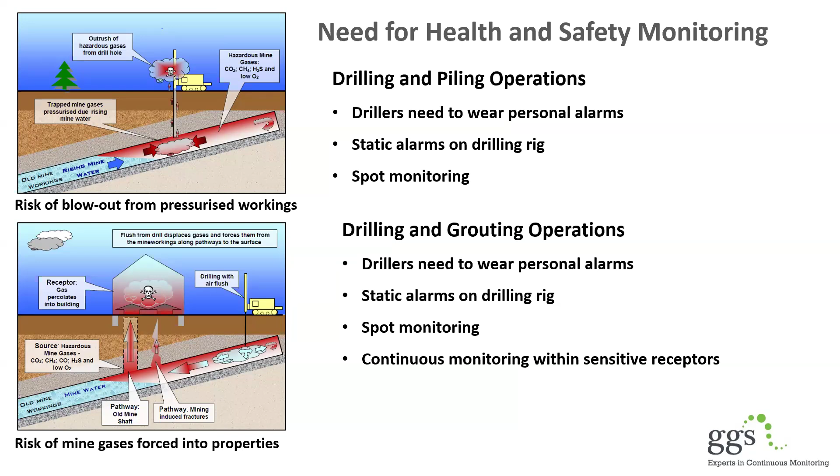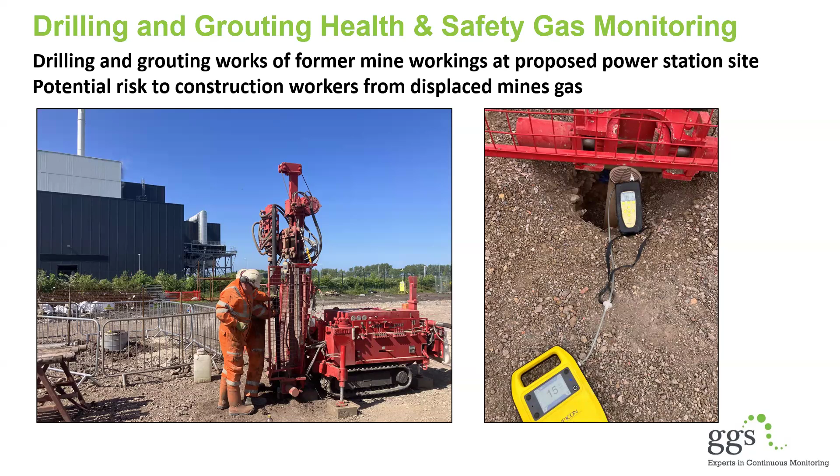So this is what we have done on a number of projects. This is a new heat and power station project where we were carrying out the health and safety monitoring of the drilling operations and piling operations, where the potential risk was to the construction workers from displaced mine gases. We've also been involved in doing continuous monitoring of sensitive receptors, as well as health and safety monitoring of drilling and grouting operations. This is a new station being built in a former mining area.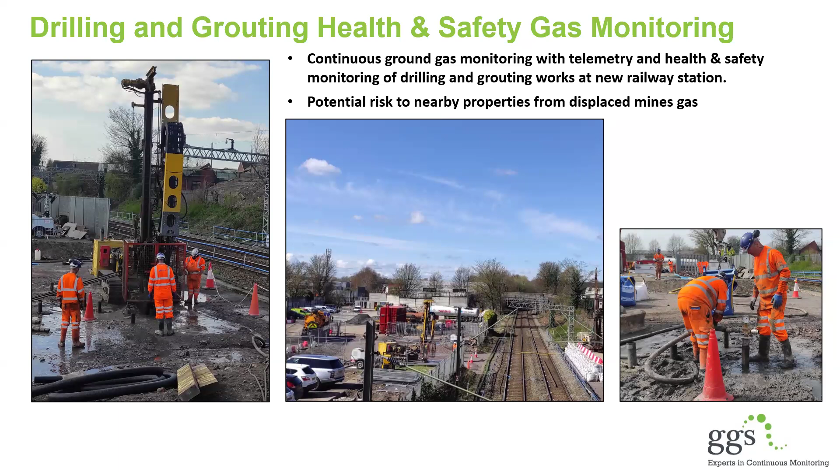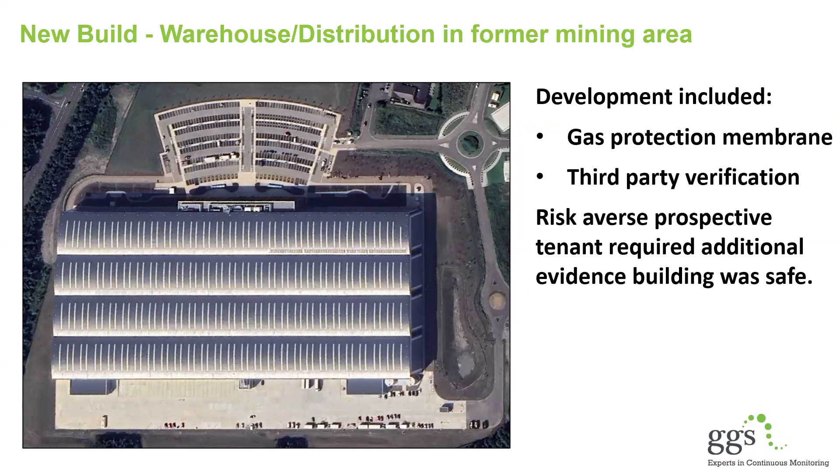But if everything has gone according to plan and gas protection measures have been installed into a new development, things still can go wrong. My final case study is of a new build warehouse in a former mining area. The development included gas protection membranes over the full footprint of the building, which were third-party verified. But the potential tenant was very risk averse. They were going to be using automated loading and robot machinery inside the space, and they wanted additional evidence that the building was safe.

So we were employed to carry out a high resolution internal sweep survey of the building. Unfortunately, we discovered percentage scale concentrations of methane entering the building, particularly around the stanchions. We found concentrations at ground level of 5% methane in this building. So despite site investigation identifying it as a risk, and gas protection measures being required in the building, which were third-party verified, that gas management system failed in this case. The client did not rent this building. And there are legal cases being considered regarding the developer and the other parties involved with gas protection.

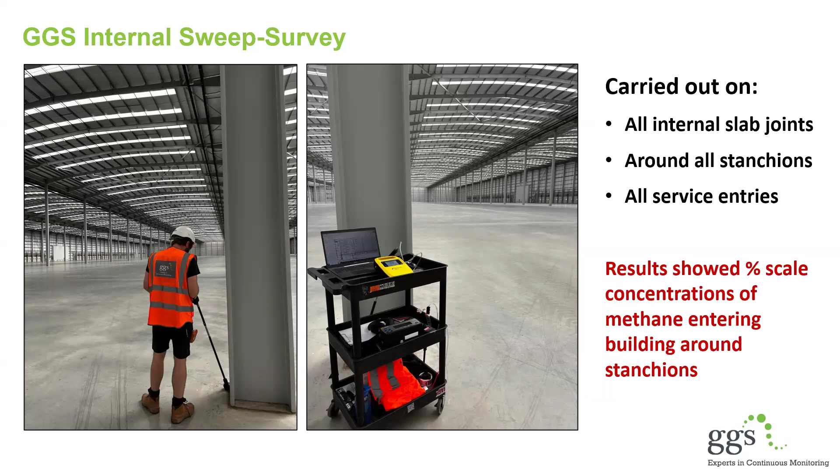So, in summary, open voids in abandoned mine workings are probably the greatest gas risk that we face in the UK. Potentially large volumes of hazardous gas represent a significant source. Preferential gas migration pathways include the existing shafts, adits, and natural features such as faults. But we also have pressure-driven migration along pathways which can move large volumes of gas.

And the additional factors to think about are the site investigation boreholes, drilling and grouting, improvement works, the foundation designs themselves, should vibro piles be used, atmospheric pressure and rising groundwater. But also, if everything else is done correctly, if gas protection is required, then we should have high quality installation and verification. I view that as being essential.